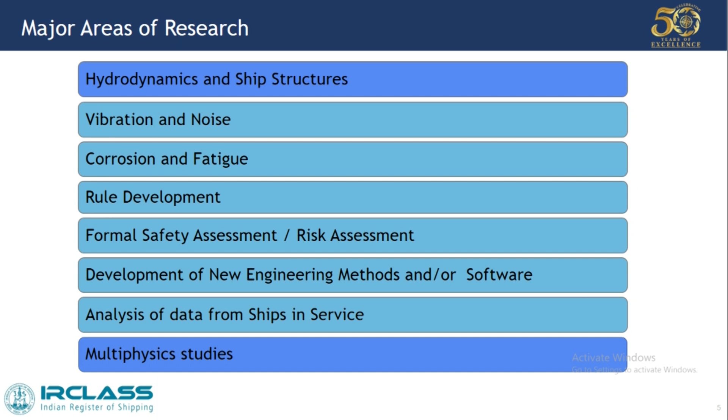Our major research activities include hydrodynamics and ship structures, where I am linked, then vibration and noise, corrosion fatigue, and rule development — we make the rules that ships, ports, and harbors need to comply with. Then formal safety assessment, development of new engineering tools and methods and software, analysis of data from ships in service, and multiphysics. Other than CFD, we also deal with infrared signatures and other activities.

So I will be talking more about CFD. The International Maritime Organization, IMO, has made new regulations like the Energy Efficiency Index, targeting zero carbon emission policies by certain deadlines. Every existing ship and upcoming ship to be built needs this energy efficiency index value to be within the limitations.

If they are not able to meet this, they need to fit some energy efficiency devices and increase the efficiency of their shipping and propulsion units. So every owner will approach our service in this case to provide this efficiency assessment. The IMO has said you can perform CFD and validate your vessel to check whether it is complying or not.

We do sea keeping and maneuvering analysis — sea keeping for ship motions, and maneuvering for zigzag and maneuvering capability of the vessels. Then propeller cavitation, in order to minimize noise from the propeller, since underwater radiated noise is a concern for IMO as it disturbs aquatic animals, so that should also be within limitations.

Then ship airwake. This we do specially for naval vessels, for helo operations where aircraft are landing, so the airwake from the upstream should not interfere with the helo operation areas.

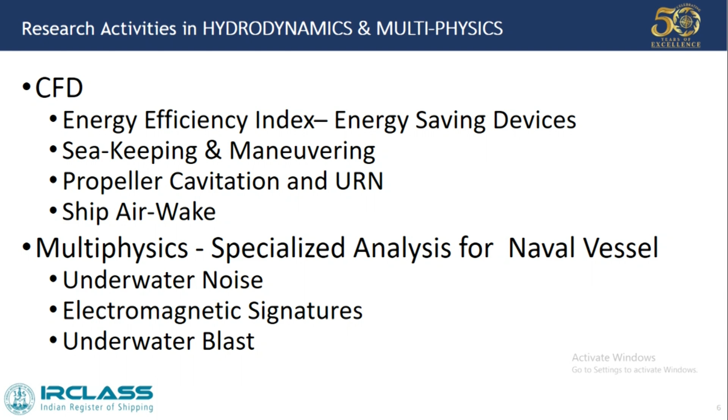Other than CFD, we do multiphysics and specialized analysis for naval vessels — underwater noise, electromagnetic signatures for naval vessels, since our vessel should not throw any signatures, and underwater blast. These are the other tools we use for computing these services.

So, ship resistance — this is our kind of day-to-day work. Every ship needs to come for plan approval to us.

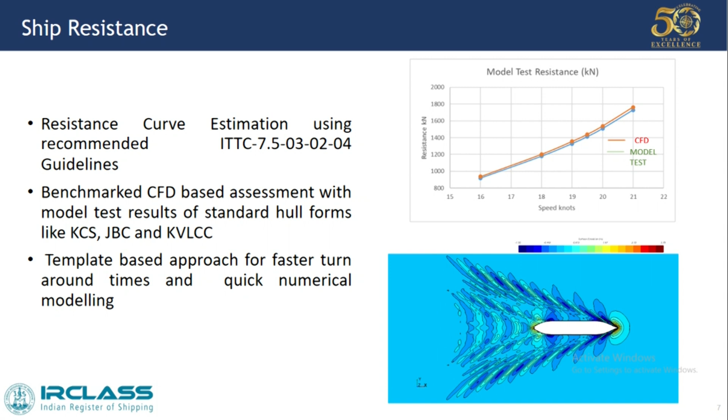So we need to validate their reports; we need to compute the resistance, whether their effective propulsion is fine, and whether they are able to achieve the proper speeds. Currently we are using CCM, and partially this is a multi-phase, two-phase flow. So partially we will be doing OpenFOAM also in this.

The next part will be open water, to compute the open water characteristics of propellers: how the propeller will behave behind the ship, at what RPM it should be operated, and what will be the efficient operation of the propeller. That needs to be computed.

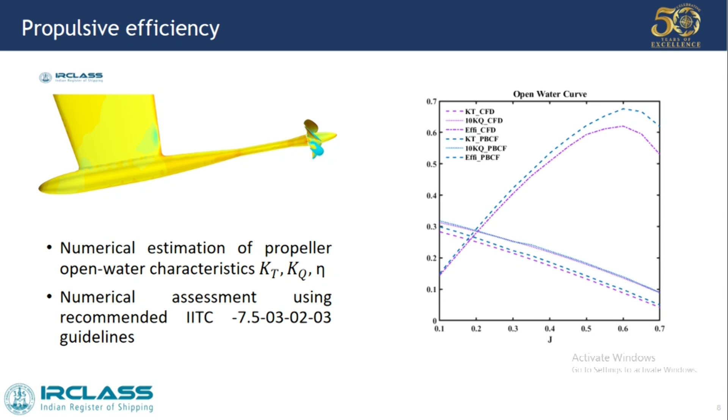Then self-propulsion. Here we will finally rotate the propeller, and the propeller forces will be transferred to the body, and finally we need to arrive at the reference speed-power curve. From there, the ship can achieve a particular speed.

As per EEXI regulations, they will be operating at 75% MCR, and if the EEXI value is beyond the limitations, the ship owner should go for power limitation. That will lead to reducing the speed or reducing the tonnage, which may again produce a loss to the ship owners.

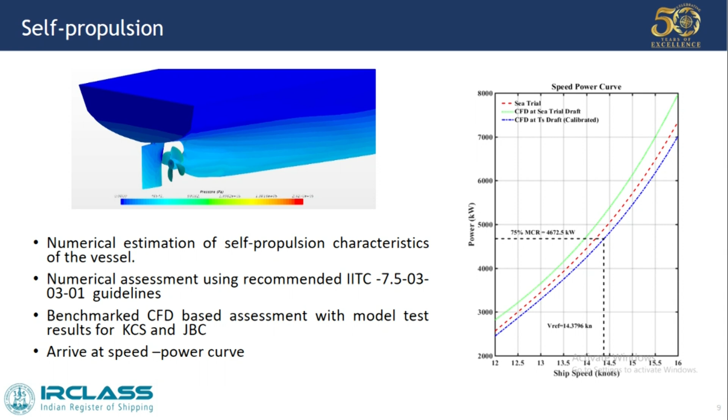Next comes energy saving devices. We can adopt some energy saving devices and improve the efficiency of the hull and propulsion unit. Some examples are the Mewis duct and propeller boss cap fins. IMO has regularized that you first do the CFD, come up with the improvement of efficiency, then proceed further.

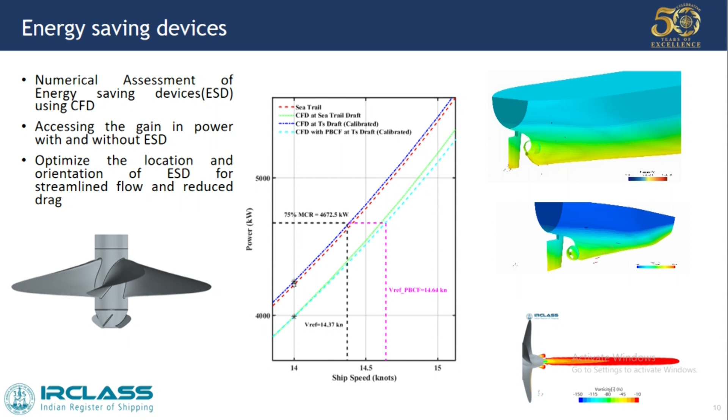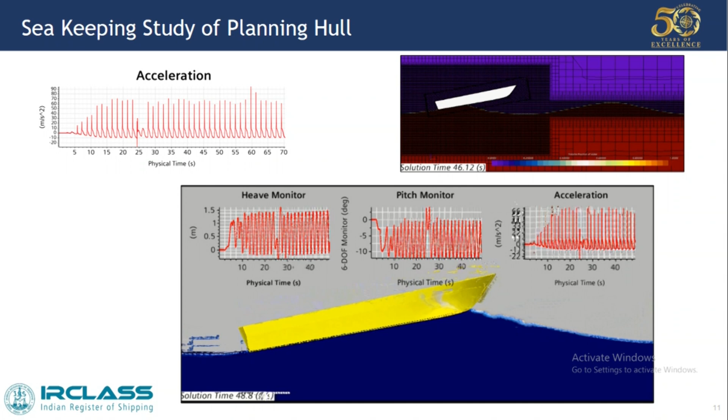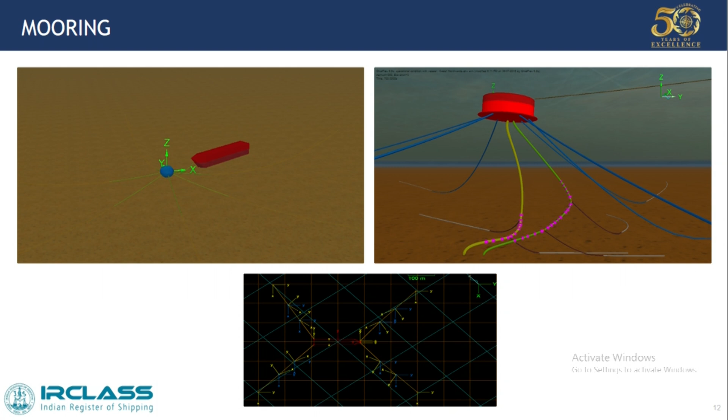Next, this is the seakeeping of planing hulls. Seakeeping we normally do for vessels where passenger comfort is more of a concern. There we check the vertical and horizontal accelerations, normally for coastal patrol vessels. We also do mooring, calculating the tensions in the mooring lines, whether the barge or boat will be held in position.

The next part is propeller cavitation, where we need to compute the underwater radiated noise. As I said before, it should not disturb the aquatic animals. We study cavitation using the Rayleigh-Plesset model.

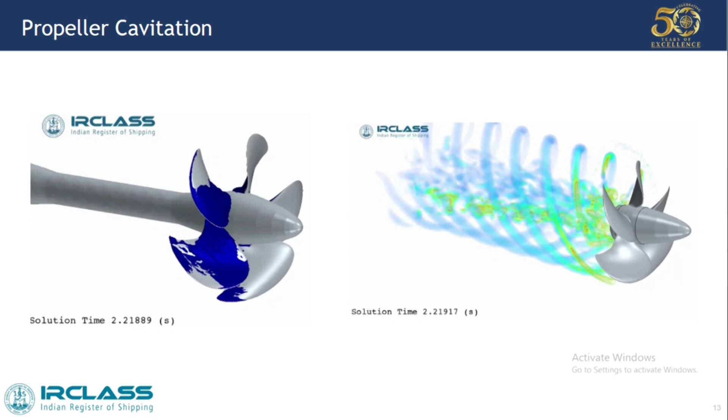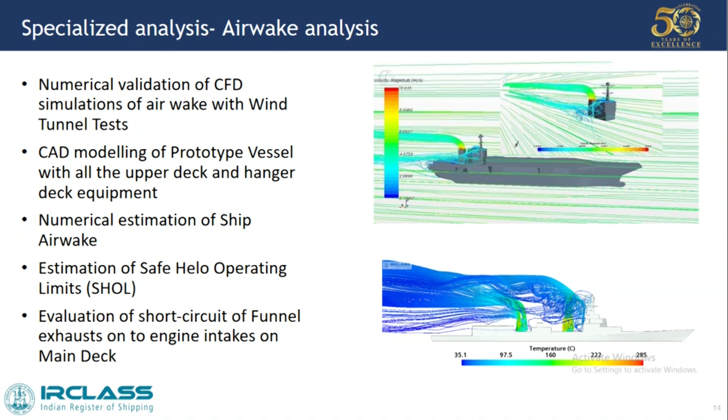So that's all from my side. In part of this work, I am shifting everything towards OpenFOAM. We are currently using CCM, but a few parts like resistance and open water we are able to do in OpenFOAM. Two years back I met Janani madam, and we are working towards making a GUI for it. That is our future plan.